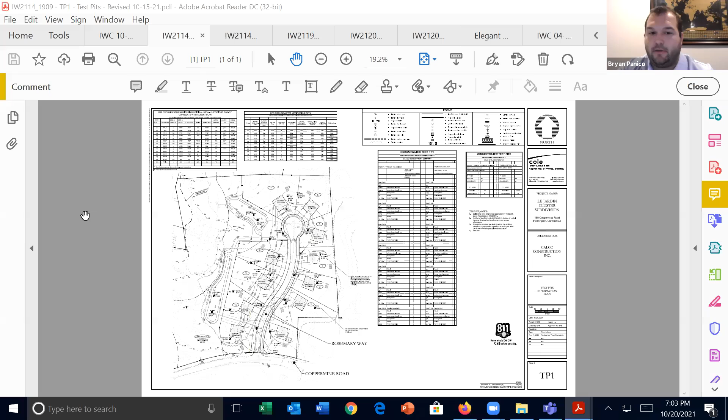So I'm just going to go briefly through the changes since last meeting, to save everybody some time. We did some additional soil testing at the request of the staff. We also read the existing monitoring wells that were done, and we basically compiled and edited this new sheet to show all of that data. It shows both the old data and the new data, how all of that data relates to this site and this plan. Being that we've shifted things so much in comparison to the other plan, we did some additional deep test pits in the areas of the detention basins, and then we did one additional test pit in the area of the houses on the western side of the road.

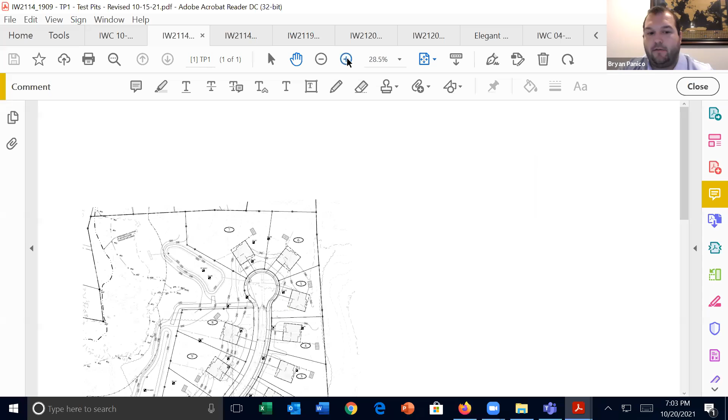One of the big concerns with the detention basins was groundwater. If we put these basins, how deep can they be? Would we hit groundwater? What we've found was that both of these basins, as we're proposing them to be about a foot or so deep, will be fine as designed. We will be outside of the mottling elevation.

So that was another thing we took a look at, what's the high groundwater elevation at this time compared to the historic high groundwater elevation, which is usually indicated by redox and mottling. We've gone through and highlighted on this plan where those test pits are, the new test pits, and what the elevations to mottling were in those areas.

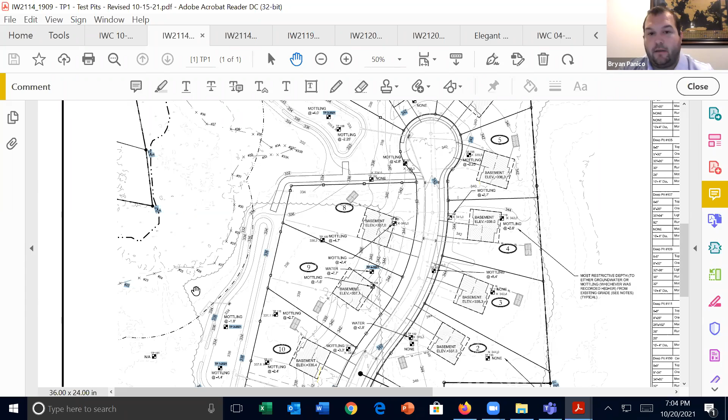I believe the other main thing we did was look at those monitoring wells, just to take a look and see. One of the concerns and questions that had come up was, is that high groundwater something that's going to be sustained constantly, or is it seasonal?

In going and looking at both the old test results and taking readings ourselves, we found that almost all of the readings we took were substantially lower than what the mottling elevations were, or what the groundwater elevation readings were back from 2014. That indicates to us that this is more of a seasonal high groundwater table.

So what we've taken a look at since then, and some of the modifications we've been making, were raising up the houses and raising the basement elevations, as well as lowering our storm drainage in the road, so that if and when we build these houses and decide to design footing drains for them, making sure those footing drains are all done by gravity.

Major concern from staff was, are these going to have footing drains that are just going to be pumping water out of the site, 24/7, 365 days a year? Are they going to be on pumps? Are they going to need backup generators and concerns such as that?

So by making these gravity and by elevating these basements so that they're outside of the typical groundwater elevation, while some of them do still fall slightly below where that mottling layer is, which is the historic high groundwater layer, that's not a level that would constantly be receiving water. So we're not into a groundwater elevation during the dry season. This is more at maybe the peak of the wet season, where these footing drains may be working a little bit.

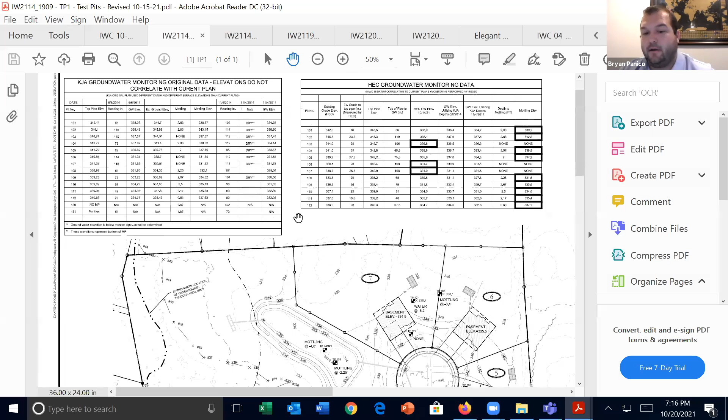So in that table, the seasonal high groundwater indicator is the level we've held as the most restrictive on these plans. When you go back and look at the actual plan, there's a note next to each test pit as to what the depth from existing grade to that elevation is, just to give you a better sense of where you're at.

That's the record high, where that seasonal groundwater table appears to stain the earth. That's the high groundwater, and that's the water these footing drains would be taking care of. So that's what we've tried to do for each lot, to make it easier and clearer to normalize all this data, since groundwater was such a concern.

Thank you, Bryan. Unfortunately, Bart just got back to me and said it's still not working for him. Oh, we just saw him—I think he's in. Yeah, Bart, you should be able to unmute your microphone and participate. Got it, there you go, perfect, we hear you. Okay, sorry for being late. No problem, sorry for the trouble logging in.

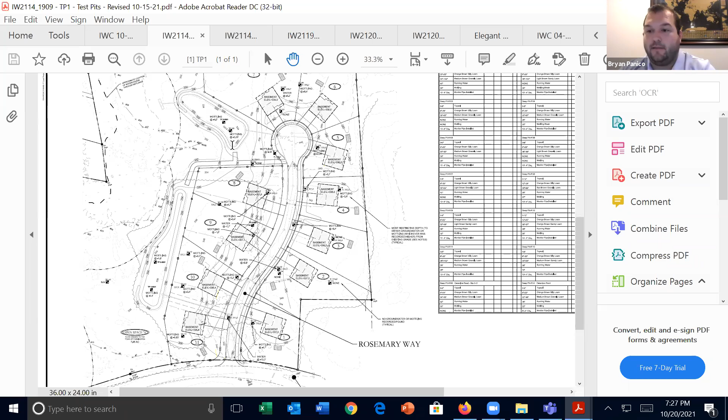So as Bart has discussed, we've significantly deterred the storm and held it back so that we're releasing at a much longer time interval, storing a lot more volume on the site by breaking it up into these two portions. I should point out, by breaking it into two separate detention areas instead of one larger, deeper one, the potential for infiltration is greater now because we've got more surface area covering the bottom, and we'll be able to use more potential infiltration, further reducing the amount of flow coming off the site.

So all in all, I understand the neighbors have some concerns to the north, but overall we are lowering the peak flow through the system. We've checked through the 100-year storm, even though I believe the town requires only a 25-year storm on the roadways. Even looking at the outfall on the 100-year storm, we are reducing the peak and have the potential to infiltrate further. So the net increase in flow is going to be less than what's happening at the present time.

Okay, thank you, Bart and Bryan. Is there anything else to update the commission on?

No, I think the only other thing, and Shannon, I know you had asked, we would be happy to grant an extension. I know town staff hadn't had a chance to go through all of this data, as it took us a little while to get everything collected and get out there and do all of this. If it would make it easier for town staff, we'd happily grant an extension so they can have more time to review all this new data and information, if that makes life easier.

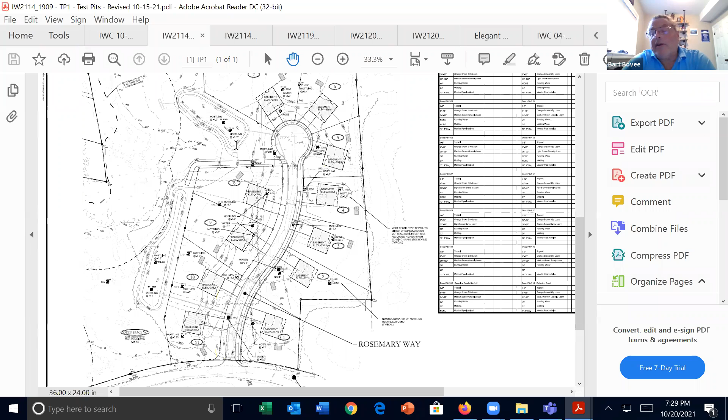Yeah, thank you. And I can also point out that, if wanted, we can even quantify the infiltration rates out there. We've been making some general assumptions and tried to be as conservative as possible, but we can quantify that percolation rate on site to verify what we said is true at the next meeting.

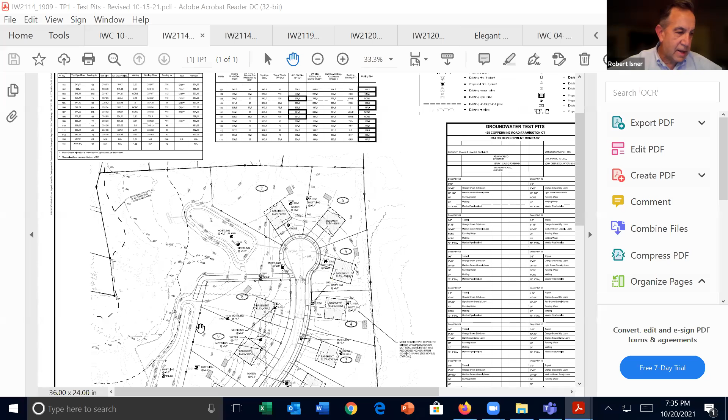Okay, thank you Shannon, that helps a lot. So for the commission, I think the issue we have to first address is whether we think this is a significant activity in terms of impact to the wetlands, or a regulated but non-significant activity. I think there has been a lot of information provided. The majority of the development is outside of the regulated area. The only home within the regulated area is lot number 11. So the commission needs to differentiate between significant public interest and significant wetland impact. While I recognize there is significant public interest, I would lean towards this being a regulated but non-significant wetland impact activity. I'll use that as an opener on the dialogue as to where we think we are with determination on significance. So maybe we can just go around and get some feedback and thoughts to see if we are leaning towards a consensus on determining significance tonight.

So Rich, do you want to share your thoughts on significant or non-significant? I would agree with your assessment, Robert.

Okay, Dave, your thoughts on significance? Yeah, I would agree as well that there's not a significant impact to wetlands, but it's probably a significant public interest.

Okay, Neil, I know that you're coming in a little late on some of the information, so you could either weigh in or abstain.

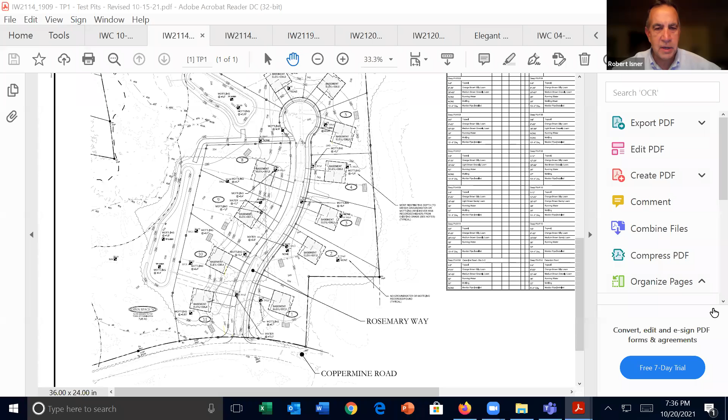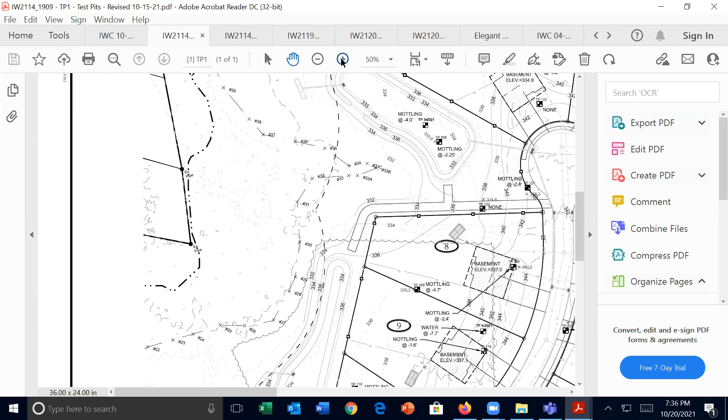Yeah, I would probably abstain at this point, since this is really my first meeting and first time seeing these plans. I am interested though in your comment about lot number 11 being in a regulated area.

So what distinguished that from the rest of the development? Our wetland regulations are designed such, and Shannon, correct me if I'm wrong, we have statutory authority to oversee anything within the wetlands proper, but we also establish a buffer zone. So our commission regulates everything within 150 feet of a wetland or water course. So while lot number 11, the proposed house, is not in the wetlands, it is within the 150-foot regulated area.

Okay, so the other houses are not. That's correct. Shannon, do you have one of the site plans that actually shows that?

Yeah, I've got to go back. Give me one sec, because I should be able to pull that up. Yeah, because we've got a good plan that has the wetland shown, and then it has a red line of 150 feet.

And the Shannon presentation drawing, if you have it, from the last meeting. I don't know, if you do. I'm going back to, I think that's September 1st. Yeah, and while Shannon is looking for that, Mark, maybe I'll move on to you on thoughts for significance.

I would say I'm kind of torn which way to go. I'm not as definite as other members of the commission. I give a little more thought, but I had a thought about which way I would go tonight, and I don't know if I totally agree with what you're saying, but I will think about it a little bit more. Thank you. Sure, well that's why we're going around seeking input and opinions.

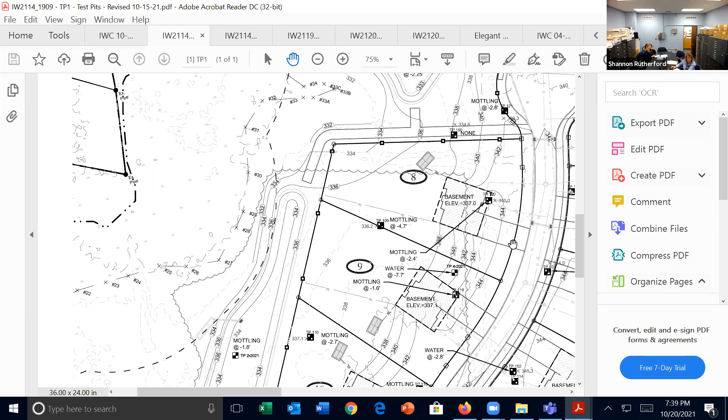Let me ask a question. So the curved line on the drawing we're looking at today, the dash-2-dot line, is that the 150-foot mark? Or what mark? That's the 150 foot to the water course, but I'm not seeing the 150 foot to the upland review on this sheet.

Yeah, I kept the handout that we had from the site walk, and it had a really nice red dotted line for the 150 foot regulated area. But I don't think I got a PDF of that, or I don't have it here because it wasn't used. So, all right, so then that's 150 foot from the water course. And yeah, you're right, I don't see it here.

Okay, so thank you everyone for your patience. Trying to find these things under pressure is always fun. All right, so just for orientation purposes, the house we were just looking at, it's the same site plan, just now it's in color. All right, the lot numbers are all here, 11, 10, 9, 8, and then the detention basin, 7, 6, and then 5 to 1 on the eastern side.

So this is the water course that runs through the wetlands, and it runs from the south to the north. And then the blue line is the wetland boundary, the delineated wetland boundary confirmed by David Lord.

This first purple line, red line, pink line, whatever we're going to call it, is the 150 foot to the water course. And then this purple dashed line is 150 foot to the wetland.

So the commission, as Mr. Isner made reference to, regulates activities in the wetlands and water courses and regulates activities within the upland review area. And then there's a wetland off to this northeast corner, and this pink line in this corner delineates the 150 foot upland review in this corner as well.

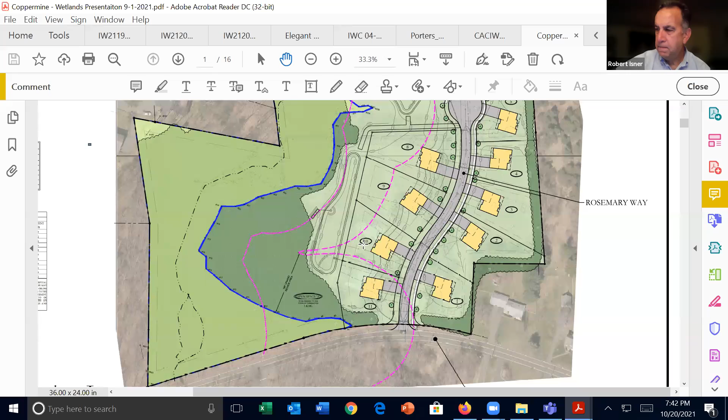So Ned, go ahead, that is very helpful, thank you, Shannon. So the excavation work that's going to need to be done for building the sedimentation ponds is completely within the 150 foot area.

So I think we're looking at a lot of excavation, and I remember seeing the improvements that were made based on the original development plans. I think they've made some improvements, but I still think that building 11 houses and a roadway is a significant project when you're right at the edge of the wetland.

So I'm pretty steady in thinking that this is a significant project. Okay, so I think the commission's pretty evenly split on regulated, non-significant and significant activity. So we'll probably need to have a motion on either way, and then try and address it that way.

I'll just revisit my thought in that clearly it's a regulated activity, but I agree with you, Ned, in that the excavation work for the detention areas and the houses in the roadway, all of that would be a significant overall site activity. But I think even with that, the impact on the wetland could be insignificant.

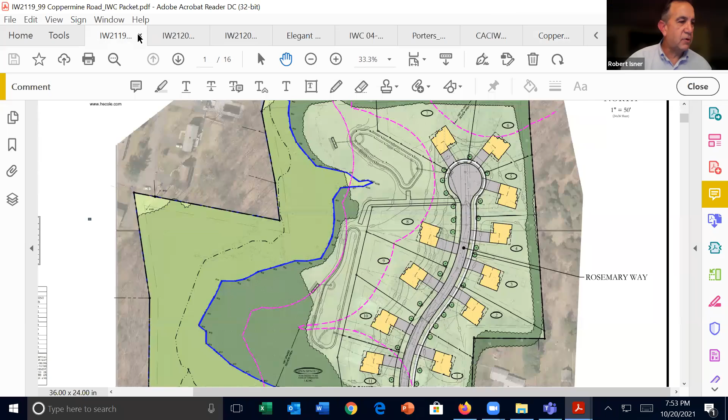Mr. Lowell? Yes, hi Jim, you got it? Okay, good evening, Mr. Chairman, this is Jim Rotundo, a licensed professional engineer with Godfrey Hoffman Hodge. As you can see, Mr. Peter Lowell, the applicant and owner, is also on the meeting. Unless you'd like me to review the proposal which we presented previously, we'd be happy to just answer any questions from the commission, or anything that came up on the site walk.

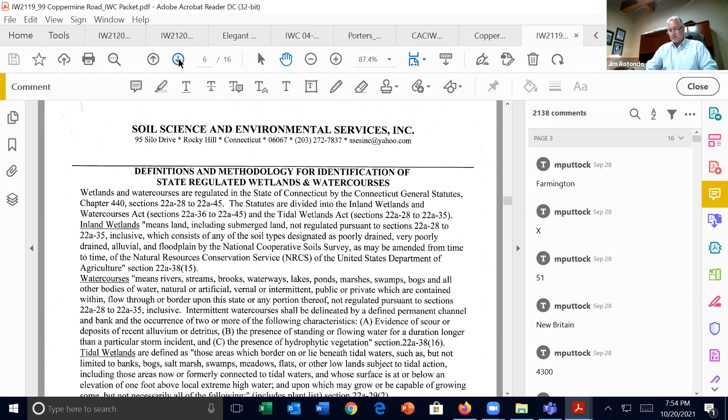However, I would like to recap a couple of items Mr. Lowell informed me were discussed during the site walk. Mr. Lowell would like to install a U-shaped driveway in the front of the house, as well as a jacuzzi and patio along the back of the house. If that's acceptable to the commission, we would like to include these items on the final plans, should the application be approved.

Okay, so we'll go around and see if there are any questions from the commission members. Ned, I'll start with you first. Any questions on that recent comment? So I'm looking at sheet C-10 on the plan. Right now you have just a straight driveway going into the garage, and I was at the site meeting. I know they're switching the driveway to the other side of the property from where it is now, which I think is a good thing because it gets it farther away from the pond. But what is his intention in making this a U-shaped driveway? Peter, can you elaborate on that?

Yes, can you hear me? I'm sorry, yes, I can hear you. I explained it to Bruce when he was there, and he said he checked the line of sight from the street and said it looked fine. All they want to do is, if you remember that tree in the front, go up the driveway where it's going into the garage, come in front of the house, and come straight down again. It's actually going to end before where the old driveway is, so it's not going to come past the wall or anything like that. That won't be touched. Does that make sense, what I'm saying?

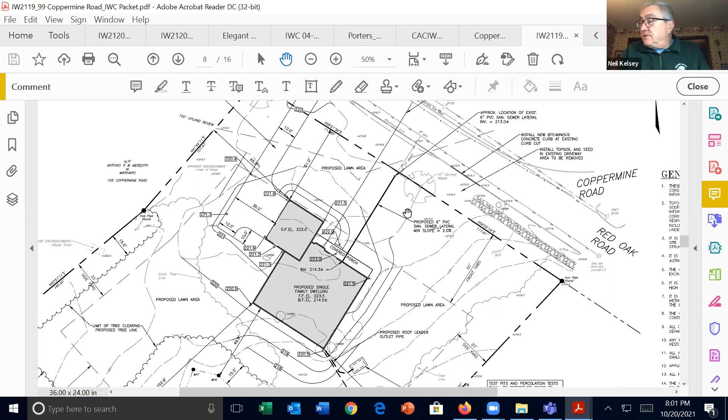Yeah, just one. I noticed on Sunday morning the well cap there - are you going to be using that well? Is it still functional, or will there be other drillings? No, it has city water, so we are not going to use that.

Dave, do you have any questions? Yeah, I just wanted to verify that a conservation easement would be placed upon, at a minimum, the wetland area, but maybe a portion of that buffer as shown.

And Peter, do you want to address that? We have a recommendation from the town staff that the commission should consider a conservation easement, which would restrict the use of the area for the limit of clearing, whereas Commissioner Fox said at least the wetland. Are you agreeable to a conservation easement?

Sorry for my negligence, but what exactly is it? What does he want me to do exactly? What do you mean by a conservation easement? I'm sorry.

A conservation easement would be noted on the plan and recorded on the land records, where you're agreeing that portion of the property would not be subject to clearing of trees, grading of soils, or installation of anything without approval from the town and town council. The easement is recorded on the land records and runs with the land and chain of title, committing to leave the wetland and adjacent buffer in its natural, undisturbed state.

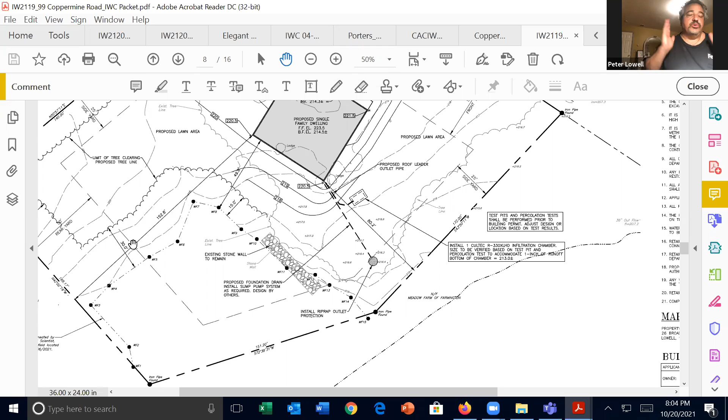I'm fine with that 30-foot buffer that we have. Anything in there I will not touch. The only thing, like Bruce explained to me when I was there, is any downed trees - there's one huge tree that I showed him that's dead and rotting. I was told I could pull that one out, but everything else he said we'll just cut down and leave flat the way it is. I will not disturb it, I have no problem with that.

That's fairly standard. The easement language allows for maintenance. Typically all that's required is a call to our office, and either someone from our office or the tree warden will come out, confirm that the tree is in fact dead or dying and needs to be removed, and you'll be given the green light to take it down. Those requests are typically handled within one business day.

So before I even touch that tree we talked about, I'll still check with you again, correct? Well no, since you've already spoken with Bruce, you're fine - that'll be done as part of the construction of the home while you have everything mobilized. So we're talking once you have your CO and the easements in place. Okay, I'm fine with that.

Dave, did you have other questions? No, I guess just to clarify, so the entire wooded area would be the conservation easement with the 30-foot buffer - so it's 30 feet on this side and 15 on the other side? The commission can decide - you could go 15 and 15 if you wanted to allow some flexibility. Ultimately it's the commission's choice, but it sounds like the applicant's agreeable.

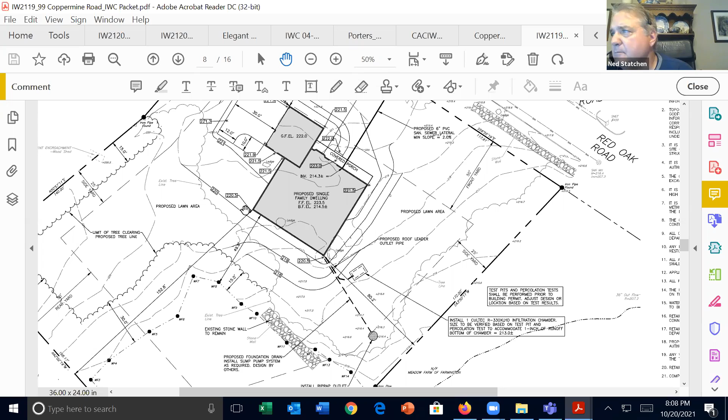I would make that motion, and would also add that this is just one house. There was previously a house in more or less the similar location of the proposed house, so the change in use is, I think, very limited.

Thank you, Ned. Is there a second? I'll second that. Okay, all those in favor signify by saying—well, before we call the vote, Shannon...

In terms of Neil's action, he was at the site walk, heard tonight's presentation. Is that sufficient to vote? It is, I believe he had additional information regarding this as well. If Mr. Kelsey feels he's well versed on this application, he would be eligible for voting. I can confirm I reviewed the application, I was at the site walk, and I reviewed the minutes of, I think it was, the October 6th meeting where this was discussed.

So with that input, all those in favor of the motion signify by saying aye. Aye. Opposed? Okay, then the motion on significance carries—the motion on non-significant activity carries.

Thank you, gentlemen. So now we can vote on the application. We could vote tonight, or we could wait for additional information. It seems pretty straightforward. We have a recommendation from staff on three clarifications for the soil and erosion control, a recommendation on a conservation easement, so we'd have to decide if we want just 15 feet from the wetland markers, or 15 feet and 30 feet as discussed, and then the last was including an integrated pest management for property maintenance.

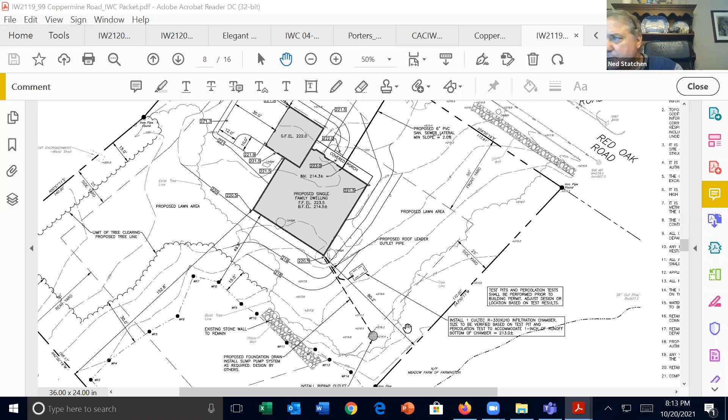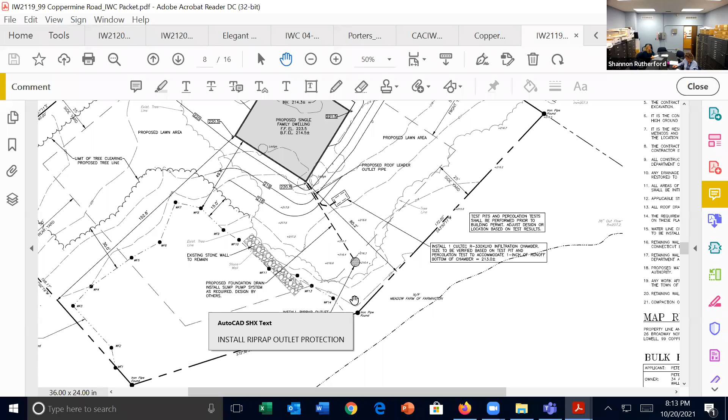We could, yes, so that would be the three: soil and erosion control. We didn't discuss IPM, the only thing is I see here, we didn't discuss a proposed foundation drain. It was asked that it be relocated. Was that done on this plan, or is that still looking to have that revised? I think that may have been an engineering comment, so we can just say add in, satisfy engineering comments to the satisfaction of town staff, it would be fine. I'm not exactly sure where that last ended. I think this might be fine as shown. Okay, so that and the integrated pest management.

Okay, thank you, Ned. That's my motion.

Is there a second? Was that to piece it all together? Yeah, it is. Is there a second? Rich, I'll second it. Okay, thank you.

All those in favor signify by saying aye. Aye. Aye. Opposed? Okay, motion carries. Thank you.

Thank you very much. Thank you. Happy building. Thanks.

So this will move us on to item 3 under new business: Ellery Monorat, lot 8980 Twin Ponds Drive.

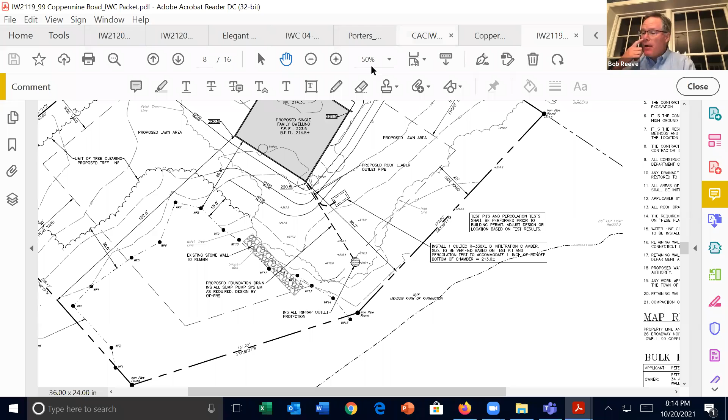Good evening, Mr. Chairman. My name is Robert Reeve. Can you hear me okay? Yes, we can, Attorney Reeve, thank you. Good evening, everyone. I'm with the firm of Scully Nixon Reeve at 79 Main Street in Unionville, and we represent the owner and the applicant, Hallery Monorat, who is also on the call.

Joining me in the presentation tonight will be Bill Aston, a professional engineer with Buck and Buck, who prepared the plan that's in front of you. The site's also been evaluated by Eric Davison, a soil scientist and wetlands scientist with Davison Environmental. You've got a couple of reports from Eric in the file. I was hoping he'd be able to join us, but he had another meeting tonight and didn't know how long it was going to go. I don't believe he's on the call, but since this is the first meeting, we'll get to see you again, and I'm sure he'll be able to join us then.

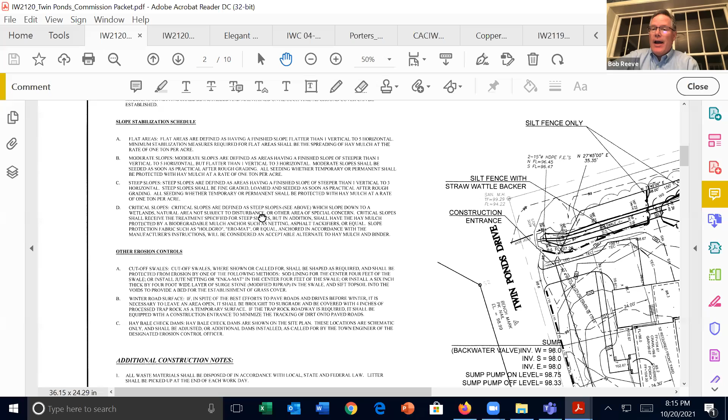The proposal is to construct a single-family home on an approved and vacant subdivision lot, on the southeast corner at the intersection of Coppermine Road and Twin Ponds Drive. This lot was approved by the Planning and Zoning Commission way back in 1955, well before the adoption of the inland wetlands statute at the state level or inland wetlands regulations here in Farmington. The town does assess the lot as a vacant buildable lot for tax purposes.

It's the rear portion of the lot, to the right on the map where Shannon is circling, that's the wetland area. The buildable portion, the upland portion of the lot, is to the left or to the west, which has its frontage on Twin Ponds Drive.

So Bill Aston and myself met with Bruce and Shannon back in July, and at that time we were showing them a different plan. We had the house further back, a full basement, a longer driveway. There were certainly more impacts to the wetlands from that, and they encouraged us to go to the Zoning Board of Appeals and to seek a variance so that we could pull the house closer to Twin Ponds Drive.

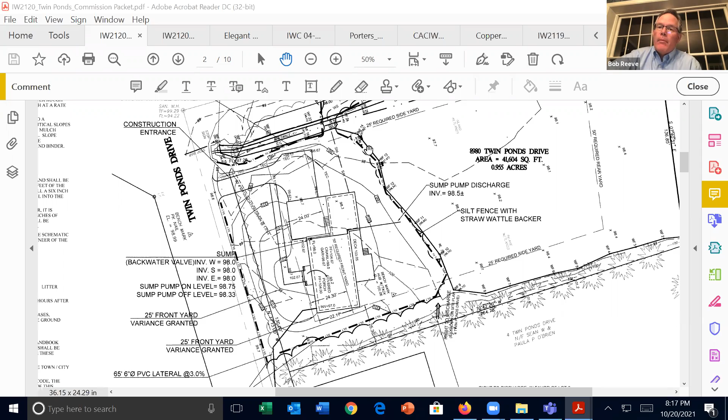The building line was normally 50 feet. We were approved last month for a variance so that we can build the front of the house to within 25 feet from the street line on Twin Ponds Drive, which certainly gets the house further away from the wetlands and reduces the impact. The house will connect to public water and sewer. The only direct wetland impact is going to be a temporary disturbance along Coppermine Road, for the water line to get to the site. And the impact in the upland review area is going to be to clear and grade for the home site.

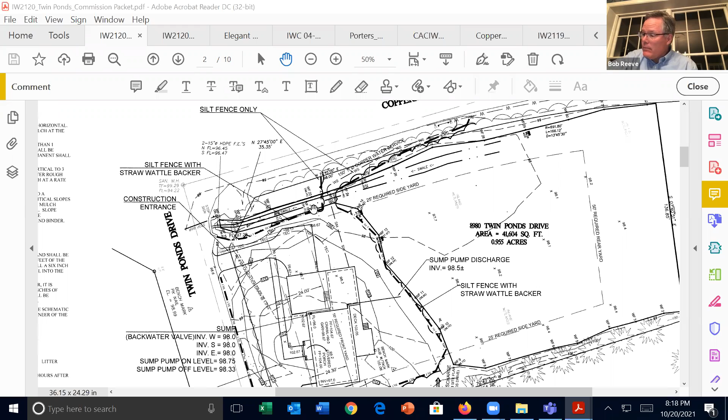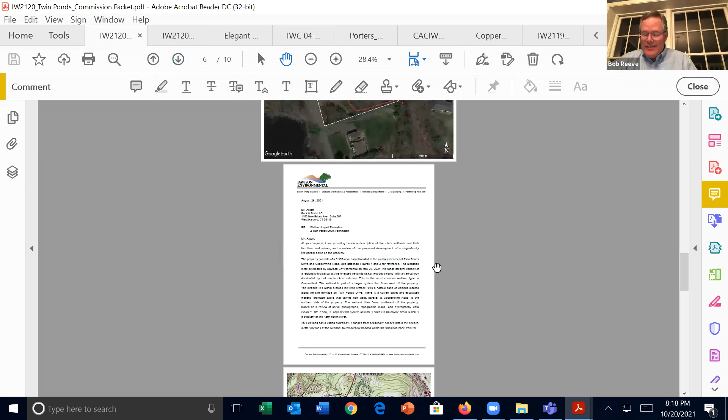If you had a chance to look at Eric Davison's second letter - that's my dog, if you hear something scratching, sorry, Kirby - he talked about three options that were studied for the site, and this is really the least impactful of the three different options that Bill and Hallery had looked at. So with that, I'll ask Bill to give you some of the details of the site plan.

Thank you, Attorney. Hello, I'm Bill Aston from Buck and Buck Engineers. Our office is in West Hartford, and I live in Farmington here. I have been working on this lot since 2003 under the previous owner.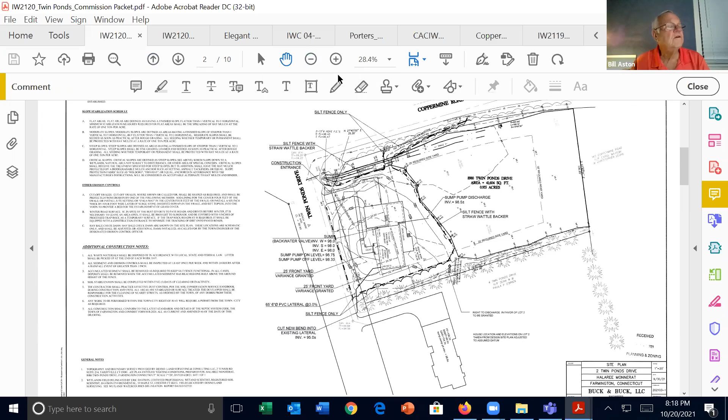The wetlands was flagged back then, and we had it reflagged by Eric this spring. We had topo taken on the lot by Brian Deno on an assumed datum, so just to confuse things, it's not anywhere near the datum across the street.

Our house is located, as Bob said, 26 feet from the edge of the right of way, giving us a 1 foot buffer in the stakeout. We are proposing a house with a crawl space at elevation 99, which is basically at existing grade and about 6 inches above the low point of the road.

We will have a drive-in garage at about 8 inches above that. We'll have a 4 foot rise to get to the first floor in the garage, and correspondingly outside, we have a sidewalk sloping up to the front door, which is also 4 feet above the entrance to the garage.

We are grading out in the front of the house to limit the amount of exposed foundation. In the rear of the house, we have dropped the grade approximately 2 feet, so that at the house, we are grading up about 2 feet from the edge of the wetlands.

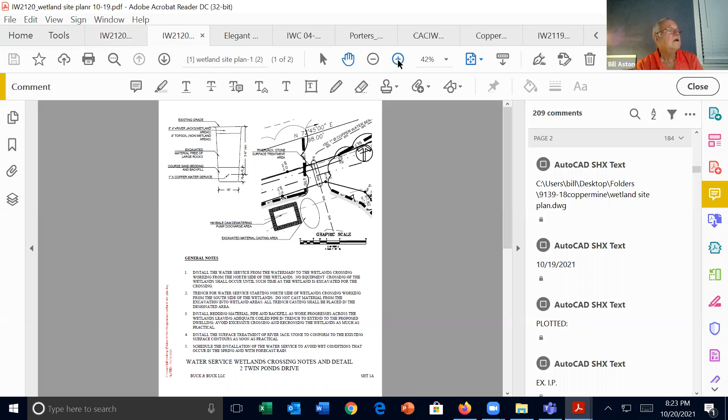I have sent Bruce a detail of the crossing with the proposed trench detail. Our plan is to bring the water main down along the road and then start working from the south side, and then excavate across the ditch in wetlands as we go, backfill, so we don't have to go back and forth through that area with equipment.

And we are going to replace the surface material in that area with river jack stone rather than topsoil, so it won't erode. And you can see that if you read, we're not going to let them place any material during construction in the wetlands. They have to place it outside.

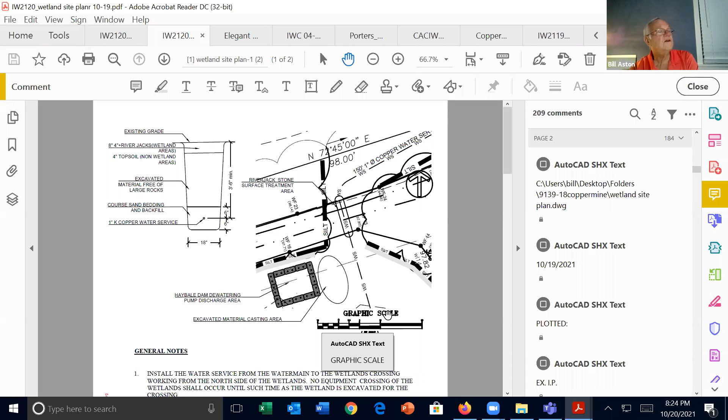And we're providing a hay bale dewatering area for the pump outside of the wetlands so that they can dewater the excavation across the wetlands if they need it. I think that highlights the plan. If you have any questions, I'd be happy to answer them.

Okay, thank you. Attorney Reeve, anything else, or should we go around and take questions from the commission? I don't think so. I don't think Eric made it. So at this point, that's all we have to present.

Okay, thank you. We'll go around. Rich, do you have any questions? My question is, so you're proposing to clear the vegetation up to the wetland limit? Is that what I heard? That is correct. Okay, that's the only question I had. Thank you.

Dave, any questions? What are the plans to handle roof runoff?

We will be putting roof leaders at the corners of the house, and there will just be surface runoff toward the wetlands, with splash pads at the corners.

The sump pump discharge point, I would imagine there's going to need to be some riprap or a spreader placed at that location. I haven't shown that at present, but we will put some riprap at the end of that, just like the water main crossing.

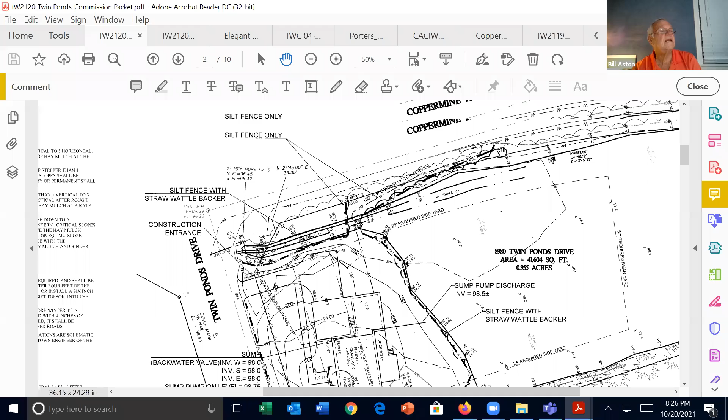Okay, so there's sewer service on Twin Ponds Drive, but no water service? That is correct. The water stops halfway across our lot. Okay.

So I'm not sure what's going to happen with this swale where you have that water going through. Is the swale going to continue down to the wetlands? The swale is actually a man-made swale that drains the wetlands, at about a 0.5% slope from the culverts at Twin Ponds Drive, and it extends back maybe about 200 feet into the wetlands. It's a ditch about 2 to 3 feet wide and about a foot deep. It's dug, and it looks like they just placed the material along the side closest to Coppermine Road when they did it.

Okay, and that culvert, does it go under Twin Ponds Drive to the pond, or does it go the other way across Coppermine? It goes under Twin Ponds Drive, but it connects to a ditch along the side of Coppermine Road, which is downstream of the pond. It looks like there's a stone dam at the north end of the ponds. Okay, it's right over where my writing is. It's not, we didn't extend the plan over that way.

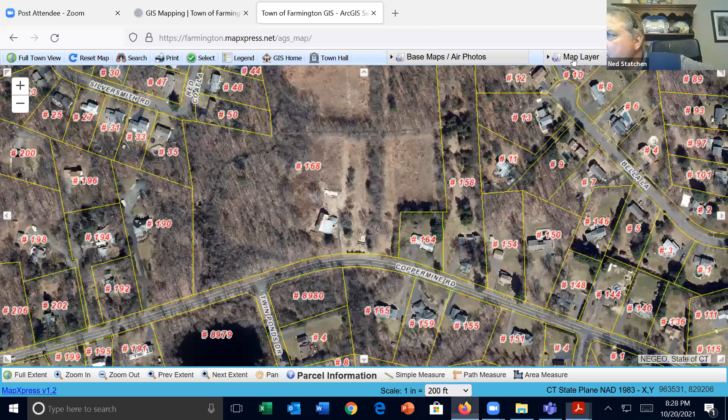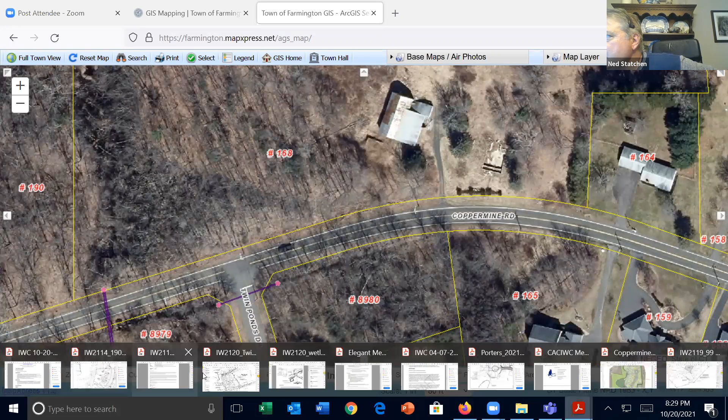Is there any fill being brought in to try to raise this elevation, or are these elevations pretty close to what's out there? There will be fill brought in to bring up the front yard of the house. I'm not sure of the volume at the present time. Okay. Really the only excavation will be to get through any unsuitable material that's on top, below the crawl space.

Okay, so you're going to have a sump pump, so I'm guessing that's at the low corner, like the inside of the foundation wall, in case water builds up inside that? There is a sump in that corner, the northwest corner of the crawl space, right in back of the garage. Okay. And that has a gravity drain through it with a backwater valve that if the water in the ditch backs up, it will close. Then the sump pump, if the groundwater continues to come up, the sump pump would come on and discharge it to the back toward the wetlands.

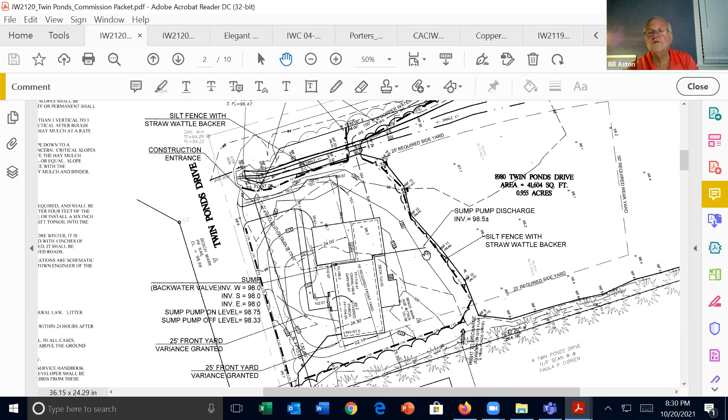Okay, and then there's going to be a separate, you have a 4-inch foundation drain, so that'll be around the edges of the foundation, and that's going to drain to close to where the culvert comes out. That is correct. Okay. And that's inside the foundation wall. It's right under the crawl space slab.

Okay, I'll just say I do have some concerns because I live around the corner and I'm driving this all the time, and it's not uncommon for me to see a lot of ponding water in this vicinity of the house. I don't know, maybe I'm wrong, maybe it's more closer to the wetland area, and maybe I'm seeing more of the water in the swale area, but every time I look at it after a good rain, it looks like that water is spreading out a lot more. I think we'll have to take a look at it and see how things look out there. But that's all I have for questions.

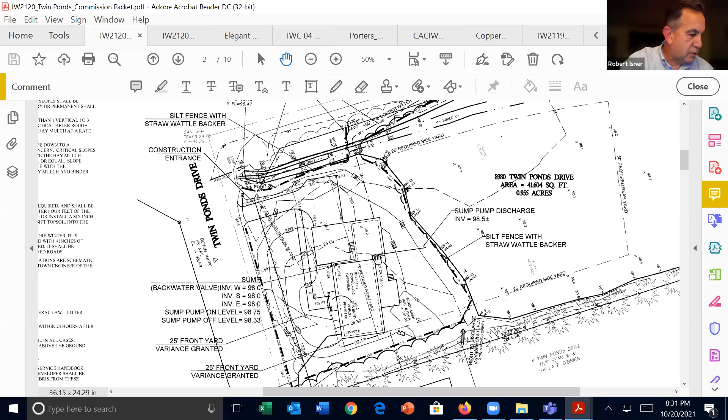Thank you, thanks Ned. I do have a question, point of clarification, just on the positioning of the water service connection. There's no alternative around crossing that wetland or that ditch, correct? Because it runs the entire length of the roadway.

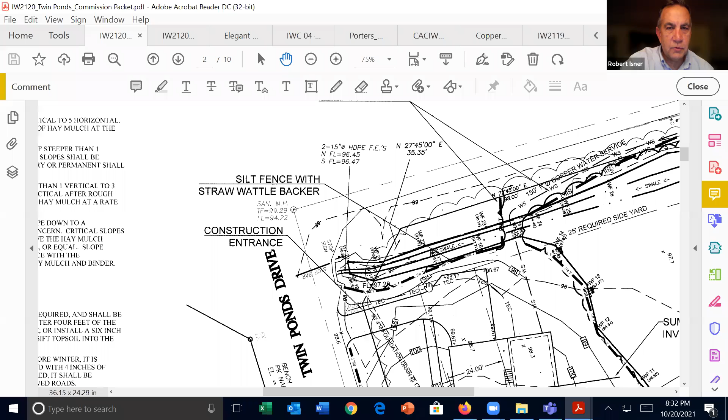The 150 foot is pretty much the maximum desired length for a water service, and that's exactly what we've got. So if there's really not an alternative, then I think the construction schedule on when that work is done and what's done to restore the area is going to be important as we move forward.

I would encourage the applicant to acquiesce to the request from the town staff to do a test pit where the building is. That will probably expedite our ability to act on the application.

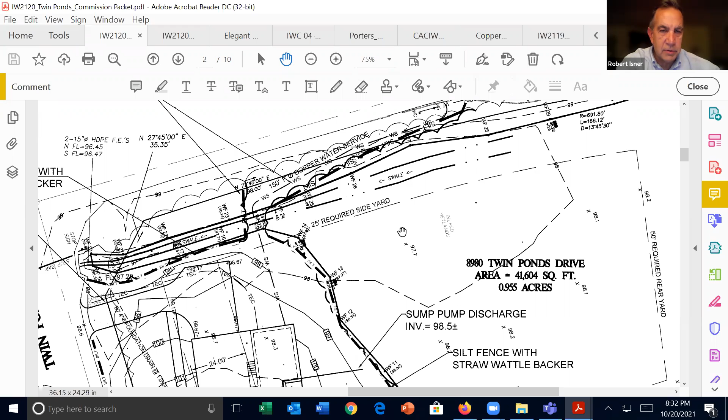Moving forward, the commission typically doesn't approve clearing all the way to the edge of the wetland. They recognize that there's not a lot of available building space, but I think it would be good to look at a minimum buffer area or conservation area beyond the wetland itself.

The last item I would raise for consideration is having a conservation easement mark where that buffer area is, and also be willing to use an integrated pest management system. So more comments than questions.

With that, I think the commission has raised all the issues we have. It would be appropriate to accept the application and then determine whether we want to do a site walk on the property.

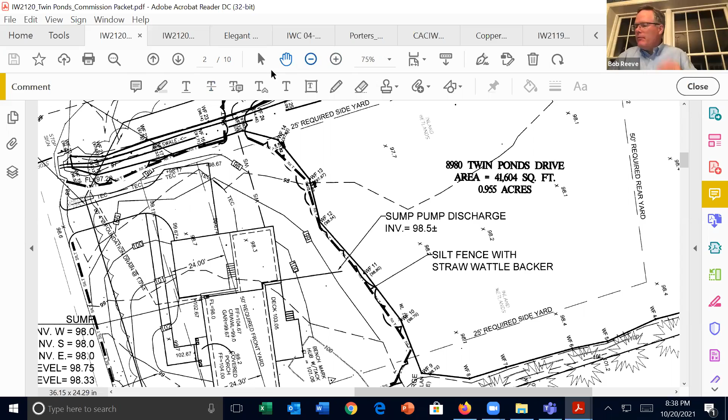Just a clarification, Mr. Chairman - the markings of the wetland, was that done recently, or is that from an older plan? That's recent, I believe it was in May. Got that report from Mr. Davison here - yeah, May 27th, 2021. Thank you. Welcome.

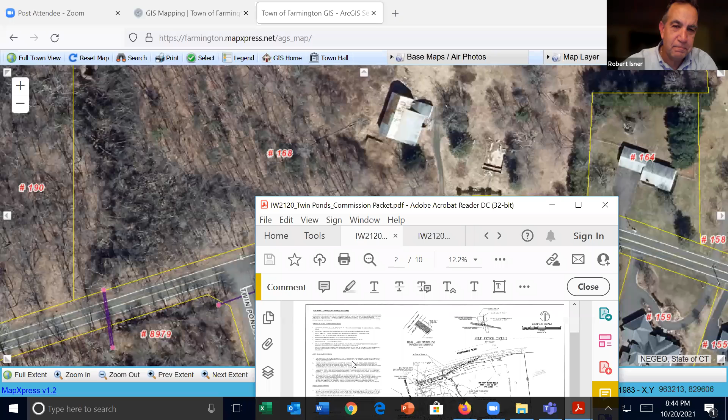And so maybe we'll jump back to, well, we'll do the minutes and then we'll go back to election of officers. Okay, well, I do have a planner's report item. Oh yes, sorry, so we can do it in any order. Please proceed, Shannon. Okay, so planner's report, I have something with respect to Miss Porter's.

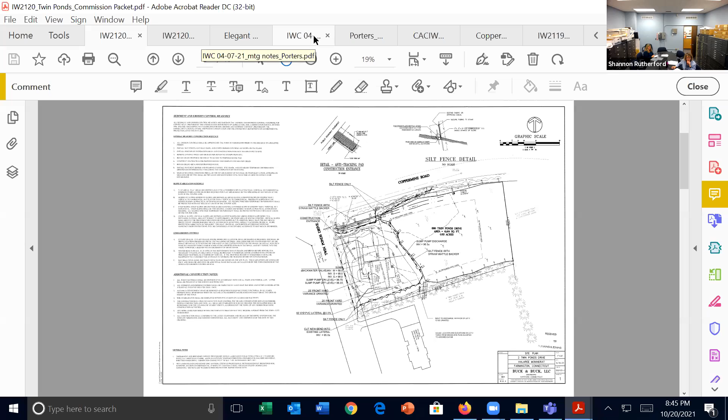And this detention pond, it was discussed during the meeting, and I've got the meeting minutes here as well, but it was discussed during the meeting that some maintenance work needed to be done on this pond. And we talked about, since this construction was going to be going on and there was likely going to be some silt and sedimentation, getting all the construction finished and then coming back to work on this pond afterwards. So they're planning on doing it during the December school break when the kids are out of school. It'll also give an opportunity for some of the vegetation to die back and the ground to firm up.

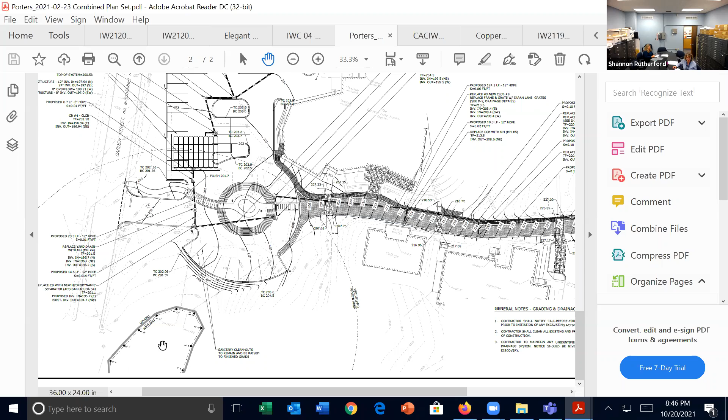So what they're looking at doing is removing some of the sedimentation that's just naturally occurred in this pond area. We're looking to create a small forebay. They did discover, which was not found on the survey - that's really here on this upper page - on the survey, they never did show an outlet for the pond. So they were able to find the outlet and confirm there is an outlet pipe. So that's going to get opened up. And then once they finish with all this, then there'll be some replanting and revegetation around this area.

So this is an update, it's a reminder. Bruce and I are going to be meeting with Porter's staff in the next week or so, and some of their contractors, because of course the contractors wanted clarification and wanted to make sure that all the i's were dotted and t's were crossed regarding this. So I'm just bringing this back to everyone's forefront.

And this is the meeting minutes from the April 7th meeting, I believe, that we talked about doing maintenance on the wetland detention basin and incorporating maintenance to the existing system in this project. And so that this feature can continue to be maintained, and then providing some type of forebay in there. So that's what they're going to be working on. Obviously, if there's any questions, Bruce or I'll provide updates as we go along. But if there's any questions or concerns, I'm happy to address any of those at this particular point.

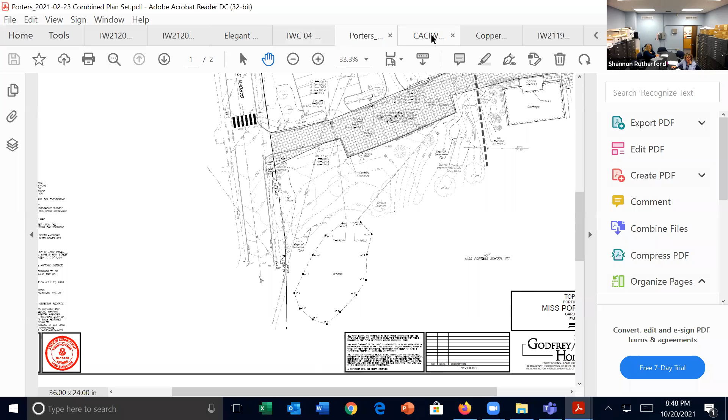The only other thing for this evening is the CACIWC Conference. It is virtual this year, on Saturday, November 6th, running roughly from 8:30 or 9 o'clock until about 2:30 in the afternoon. I can forward this out to all of you. I believe it was included in some of the information Bruce sent for the meeting, but you can check the links at caciwc.org for full information.

As members of the commission, if you are interested in attending, the town will pay for your attendance and registration fee. Folks just need to let us know, since we're coming real close on this, in order to get the registrations processed. You really should let us know by Monday of next week so we can get all the documents processed and registrants in.

Mr. Hannon has indicated that he plans on attending. Anyone else interested, just let Bruce or myself know, and we'll get you added to the registration list and take care of getting the registration completed for you. Thank you, Shannon, that's it. Yeah, that's it regarding that matter.